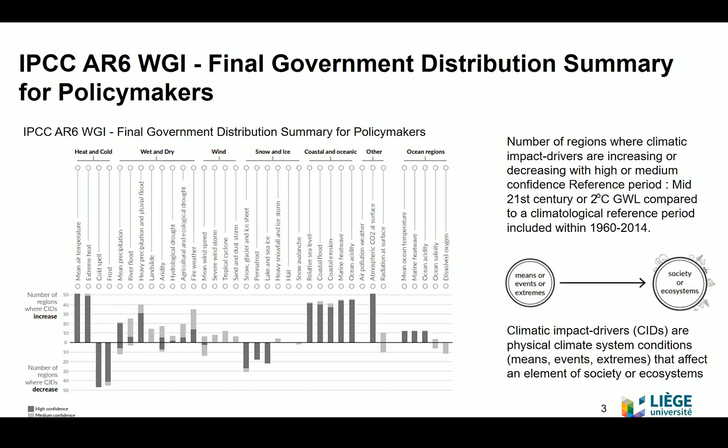And fires is the threat #1 in Europe, especially if we are in the northwest of Europe. All of us, we have a lot of greenery around us, we have a lot of forest. The challenge that we see in south of Europe related to Portugal and Spain, we have to foresee it. And therefore, air quality in association with a temperature increase will be the threat #1. Climate change will not wait for us until we take the correct measures.

In this context, in our Annex 80, we wanted to define resilience, and we needed to be more specific. We wanted to define the resilience of cooling characteristics and the risk factor around the overheating risks in buildings. And after a long work of investigation, we collaborated with the United Nations, we collaborated with the United States Green Building Council RELi rating system on resilience and the definition of resilience. We had to distinguish 4 stages related to the term resilience, mainly the vulnerability phase, the resistant phase for a building, the robustness, and finally recovery.

And as you can see, robustness entails failure. So the key message I want to talk about with you today is that when we talk resilience, we must have a shock, we must have a disruption, and we must have a failure. Without failure and bouncing back after a failure, we cannot name the building resilient. And that's what we are trying to investigate in the IEA Annex. We are even investigating the events and the shocks that can cause a building to fail. And since we are concerned with comfort, like what we saw with the heat dome in the context of North America, in the West with Vancouver and what happened last summer, that's the kind of events that we are talking about.

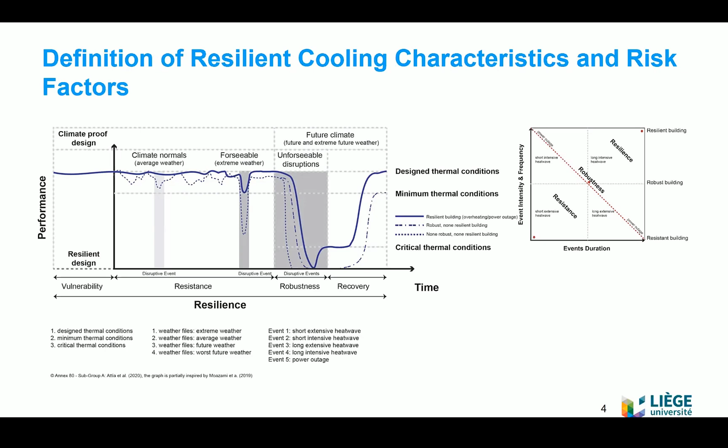So in this context, in the annex, we started to try to define some design thermal conditions, and juxtapose them against minimum thermal condition and critical thermal condition and failure conditions with different future weather files, short waves, heat waves, 2100 end of the century, mid of the century scenarios, to make sure that we can test our solutions and our sizing of our cooling technologies, whether they are passive or active.

And in this sense, we are looking at resilient cooling characteristics related to the overheating exposure risk, the exposure severity, the ability to adjust to this exposure, and for sure the ability to recover or bounce back after we were hit, for example, with a long heat wave or an extreme heat wave. And for sure, in our approach, we are coupling heat waves with power outage, because it will not be surprising that when there will be a heat wave, most probably we'll have power outages.

The third parameter we did not address, which is fires. But it seems that the extreme events around the world occurring in the recent years are confirming that heat waves will be coupled with power outages and fires. So it's very important to learn what happened in Australia 2 years ago.

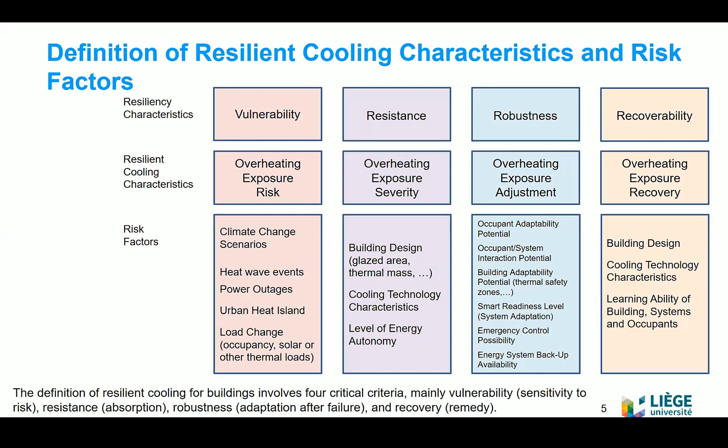So in this context, we are looking at these factors, and we are trying to define some frameworks that can allow us to run simulations that take into account these multiple criteria, whether we are taking time on the short term, a very short heat wave, or a 100-year long scenario. The scale can start with a single zone where you are grouping all occupants in one safe or refuge space in the building where you are providing cooling, or the whole HVAC system, the building as a whole, the neighborhood, the district, up to the city scale.

And for sure, we are taking into account the vulnerability to different shocks like heat wave, power outage, air pollution by fire, and so on. So this is overall the frame that we are operating in.

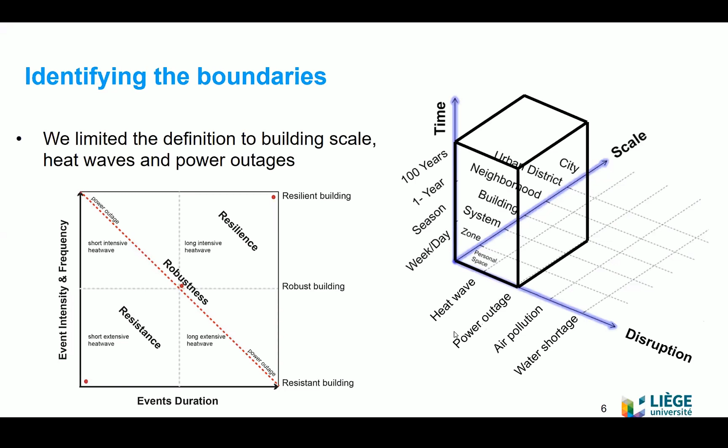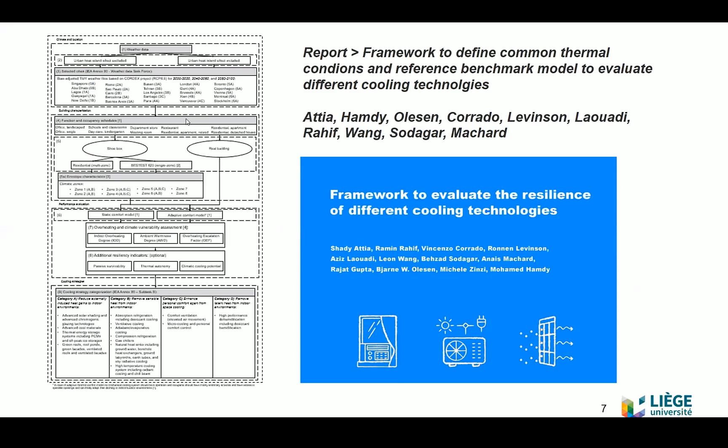So far, we managed to publish in the IEA Annex 80 a framework to evaluate the resilience of different cooling technologies. And this framework is based on simple use of future weather files and the exclusion or inclusion of urban heat island effect. And based on that, we try to find or develop a framework that can cater for the whole world. So when we mapped our work, we looked at all the planet so that the framework can be used worldwide in different cities.

And as you can see here, we have different representation of cities. Then comes in this framework, you need to define the building characteristic that will be used, whether you are using a shoebox approach representing the building in a multi-zone, or simply the BESTEST series 610, 600, 620, or if you have a real case study that you have really monitored data and you want to represent in the model. So as you can see, we referred mainly to ASHRAE 169 because it's the most accurate. It's based on cooling and heating degree days, representing a very accurate climatic characteristic of the world.

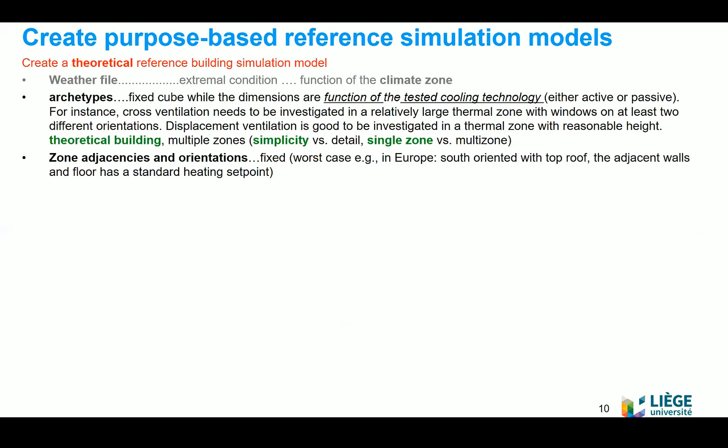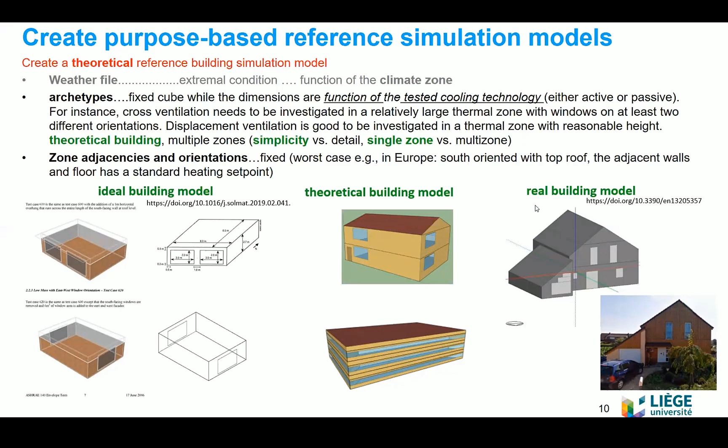And from there, the framework goes with the next step with defining the archetype, or simply the architecture archetype or the representation of the building, whether it's an ideal building model like the BESTEST, or it's a theoretical model made by experts. Like we see a lot of benchmarks published. There is a European database, there is an American database, and for sure the last option can be a real case study where you are using for running the simulation and testing your cooling technology and comparing them to check how severe will be a heat wave or future climate change.

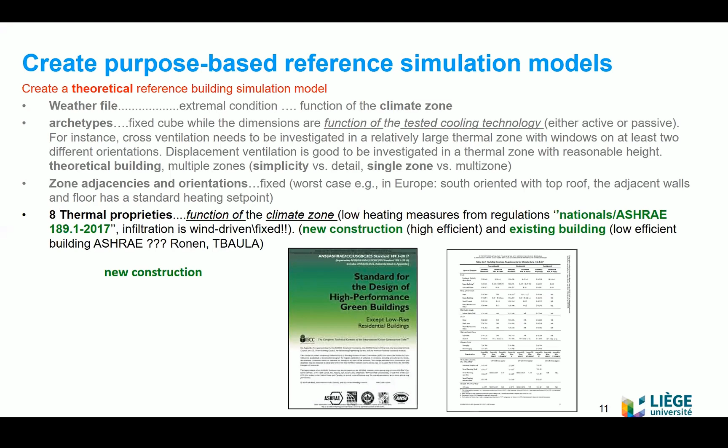After moving from the archetypes, we used ASHRAE 189.1 2017 because we had a difficulty to use the passive house standards. It was not appealing to use it all over the world. We found ASHRAE 189.1 more appealing because it defines high performance building all over the world using the ASHRAE climatic zones. So you can have it from Alaska till Madagascar, and this allows to have a more accurate representation regarding the characteristics from the envelope regarding air tightness, heat transmittance, and so on. And this is back again, like a summary of the first part of the framework.

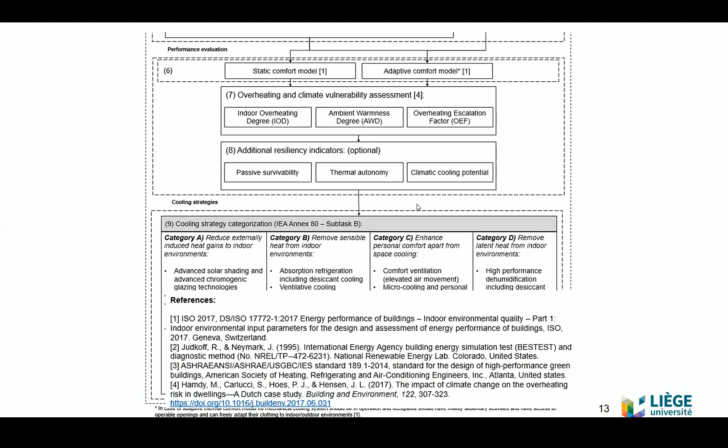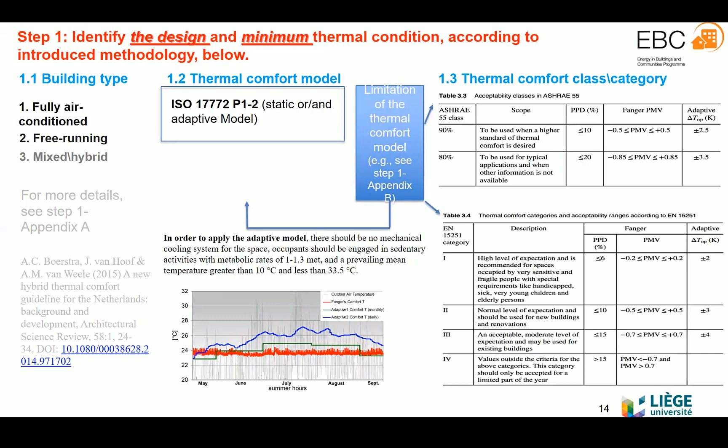The second part of the framework, we are talking here about the comfort model that will be used, and the cooling technology that you want to check in order to assure comfort and make sure that people can survive during extreme events. So far, we in the annex are working on fully air-conditioned buildings and free-running buildings. Unfortunately, we were unable to have a common international consensus on how to evaluate mixed mode or hybrid running buildings, because this is still an issue that is not having international agreement. And we are fluctuating between ISO standards, EN standards. We are even working sometimes with TM59 in the UK, very interesting standard. And all the work of CIBSE is very, very good. But we are between ASHRAE, CEN standards, and for sure ISO 17772 in the two parts are our reference.

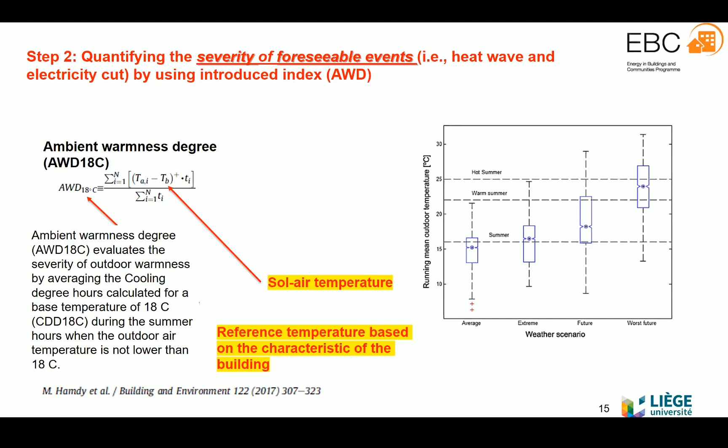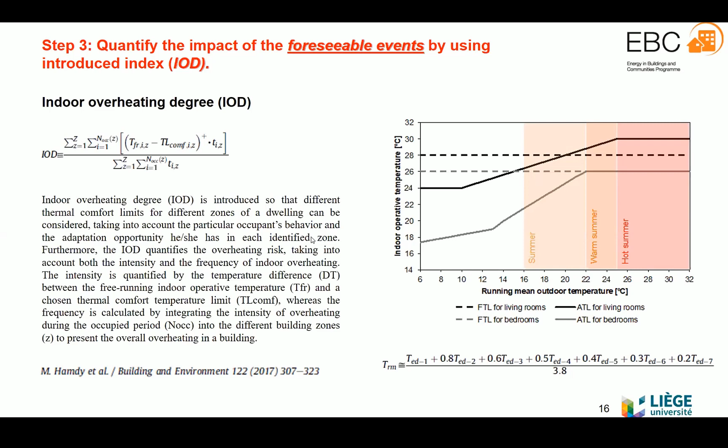So far, just to give you a glimpse, we are using a very interesting indicator which is called the Severity indicator, or the Ambient Warmness Degree indicator, which evaluates the severity of the outdoor warmness by averaging the cooling degree hours calculated for the base temperature. For sure, the base temperature can be varied, and based on that, we can estimate the ambient warmness degree. And another important indicator we are using also, it's called the Indoor Overheating Degree, which is developed by one of our members of the annex, Hamdy, and in this index we can introduce different thermal comfort limits for different zones, so it can allow for a multi-zonal approach, and then you can distinguish the sleeping room, for example, compared to the living area, and you can put more stringent requirements or thresholds regarding your comfort requirement in regard to the occupancy and the expectation of comfort.

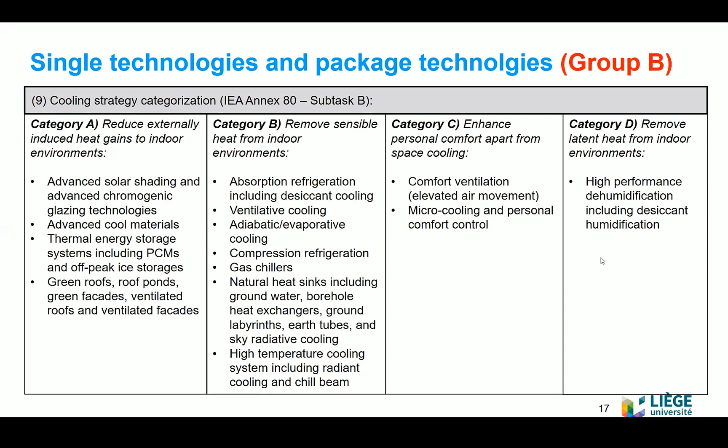So we move after that to this classification of the cooling technologies that we are trying to test in the annex. And as you can see in the annex, we are working mainly on 4 families of cooling technologies. Technologies that are reducing externally the heat gains, technology that remove sensible heat from indoor environment, and category C, personal comfort technology or systems that can be in the same zone integrated, and finally technology that can remove humidity or latent heat in the indoor environment.

Well, I'm coming to an end. I want to respect the 10 minutes limit, but if you ask me in a short word, what is beyond the COP26, the next COP will be in my origin country, Egypt, in Sharm el-Sheikh. Well, it is to prepare for climate change while living under the condition of climate change, because climate change, like I told in the beginning, it will not wait for us. So we need today to live with overheating problems and events, talk about how we will have environmentally friendly refrigerants, how can we tackle heat waves, can we run mixed mode operation of buildings, but with a standardized approach that will not jeopardize the comfort condition of people and not also abundantly use energy and resources to just space condition the building. And for sure, low impact cooling will be a necessity to fight climate change and assure the resilience in the coming years.